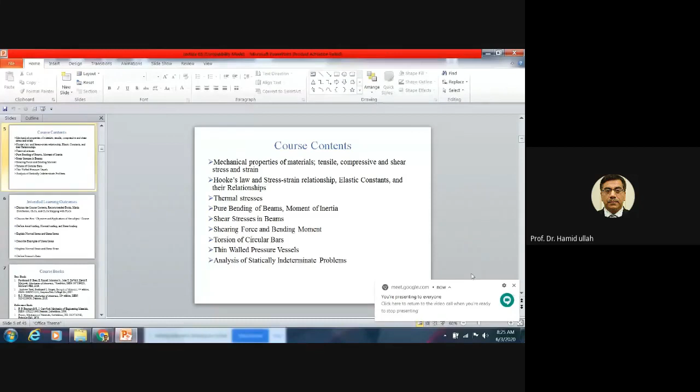No sir, there was no issue. When I shared the screen, I asked you people and you mentioned yes, we can see it. Okay, let me try again, no worries, I want to share it. Let me zoom in a bit so it appears properly. It is asking to resume presenting the screen. Hope you can see it after a few seconds. Yes sir, you can tell me again — yes sir, we can see it now, okay good. Whenever there is some problem, because I don't know, once I share the screen and you confirm it is there, then I will start teaching. But at any moment if some problem happens, the best is you let me know — for example if you cannot hear me, or the screen is not shared. I don't know what was the reason, but initially I shared it and then you couldn't see it, so let me maximize again so you can see it properly.

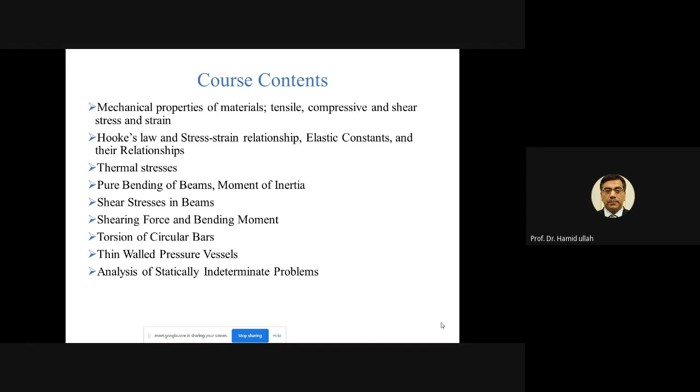So basically the course contents, I don't want to go for explanation again — these are only the topics which you will be learning and I will be teaching. Then the intended learning outcomes for today's lecture: as I mentioned in the first lecture, it is very important that for every lecture the student must know at the very beginning what they are expected to understand from it.

So these are the things — for example, since this is lecture 1, we have put an introduction type of content in the beginning. You should know the course content, the recommended books, the marks distribution, and CLO, PLO type of things, because the CLOs for the course are important and their mapping with the PLOs is important. In the classroom, in the first lecture, a detailed discussion was made on this.

And then there should be some end objective of the application of the subject, because you should know where this subject you can apply. What are the areas of application, what are the disciplines where you will be required to apply this subject of mechanics of material.

And then we will start some formal teaching, starting from load, for example what is axial load, normal load, shearing load, type of thing, and then stresses with some examples and maybe numerical solutions.

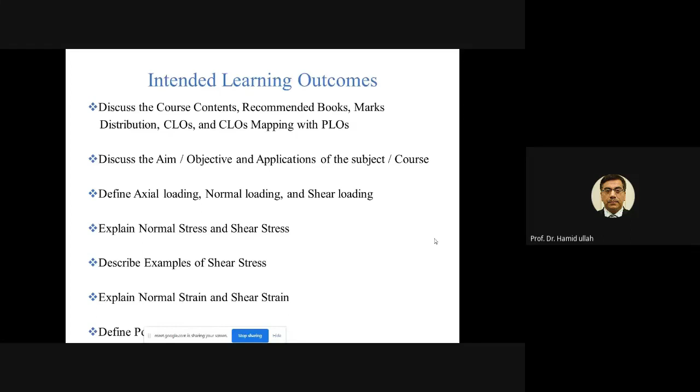And the books, you remember in lecture 1 in the class I mentioned a number of books. There are some textbooks, in the beginning I put 1, 2, 3, and then there are some reference books, 3 books are reference books.

Already I have mentioned, for every lecture in advance you will be having through Google Classroom the lecture slides, okay, PPT or maybe PDF. So already I've given it, no worry. But again, I have advised you before that it will be good that you go to the library, or maybe you can search online.

So one of these books, all are good books. I cannot say this is good and this is not good, no, these are all relevant books to the subject of mechanics of material. It's upon you which book you like the most, depending upon your sense. Some people go for simple English, some people go for good quality of pictures, etc. So you are the one to decide.

But my advice as a professor, as a teacher, would be at least one of the books, whether the top 3 or the bottom 3, you go to the library or search online, and then you must read it along with the slides I am providing. It will be something good for your learning.

And then, I don't want to go into discussion, but the only thing I want to mention here is in the marks distribution, because for sure there will be some quizzes. Already I mentioned in lecture 1, in the face-to-face lecture, there will be some assignments, midterm, final term. But now since things are changing because of COVID-19, everybody should pray this pandemic will be over soon, and then we will be back in face-to-face classes.

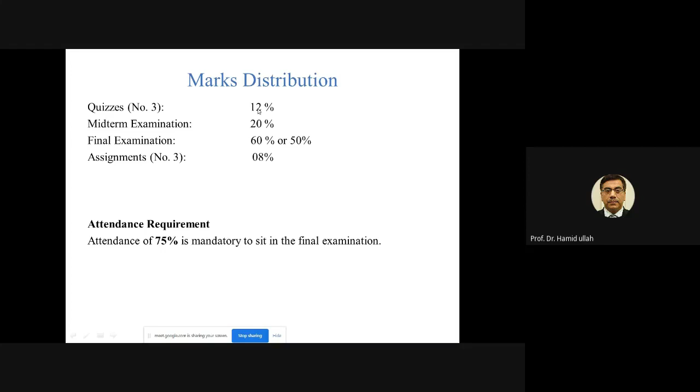And again, midterm exam, what will be the mode of the midterm exam? Once, inshallah, we move ahead, for example a week before the midterm, then we will decide the mode through which we can conduct the mid exam later on. Attendance, already you know, it is something a requirement.

So this is very important, quite a detailed discussion I have made in the lecture, because basically you are, alhamdulillah, going through OBE type of teaching and learning, outcome based teaching and learning. So there is a requirement of CLOs for every subject, and PLOs, achievement attainment.

So every subject's CLO and the program's PLO you should attain. There are 12 PLOs. If you remember, we have displayed in the department at various places, everybody should know what are the 12 PLOs, starting from PLO number 1, which stands for program learning outcome, up to PLO 12. These are the minimum which are provided by HEC. We can make it more, but for the time being, these are only 12.

And for every course, whether it is solid mechanics or fluid mechanics or thermodynamics or English, for example, or presentation or CAD, etc., there are some CLOs. CLO, you remember we have discussed, stands for course learning outcome, meaning that at the end of a particular course, this is something the students are expected to have learned.

Because once you spend one whole semester, more or less 18 weeks of teaching, at the end, what is something you should be having, but you must have learned, you must have understood. That is the expectation, and we put it in the category we call CLO.

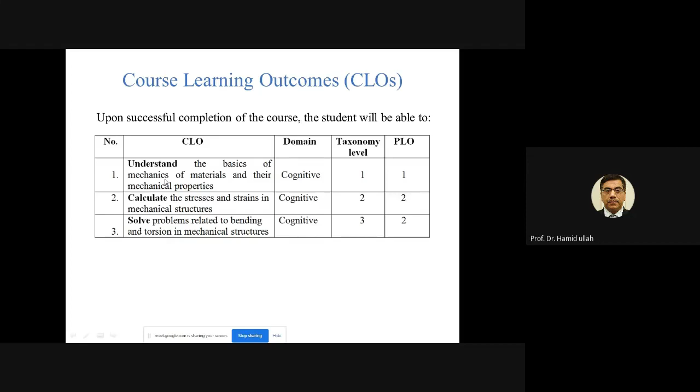Basically there are three. Number one is to understand the basics of mechanics of material and their mechanical properties, the second is to calculate the stresses and strains in mechanical structures, and the third is to solve problems related to bending and torsion in mechanical structures, and they belong to the domain of cognitive taxonomy level. CLO number 1 of this course is related to PLO number 1, and the second and third CLOs are related to the second PLO of the program.

So little discussion which already we have made, because it is a review, so not very much discussion, but a little discussion as an overview.

What is mechanics? If you remember, I mentioned that every student has gone through Matric and FSc, where you studied science subjects - mathematics, physics, chemistry and biology. In physics, mechanics is a subtopic. Mechanics is a discipline which belongs to physics, and physics belongs to science. Mechanics is important for engineering students, especially mechanical engineering students, and also for civil engineering students. So what is mechanics?

Basically mechanics is the branch of science which describes and predicts the conditions of rest or motion of bodies under the action of forces. So basically there are two things in mechanics.

One is the body, and then there is a force. If there is a body but it is not subjected to some force, there is no use to talk about mechanics. But if there is some force but it is not applied to a body, again no use of mechanics. Once there is a solid body and that solid body is subjected to external force, then you will be expected to apply your role as a student of mechanics.

And again when we say body, we have classified it into two types. One type of body we call rigid bodies, and the second type we call non-rigid bodies, or you can say deformable bodies. So what was the definition of rigid body?

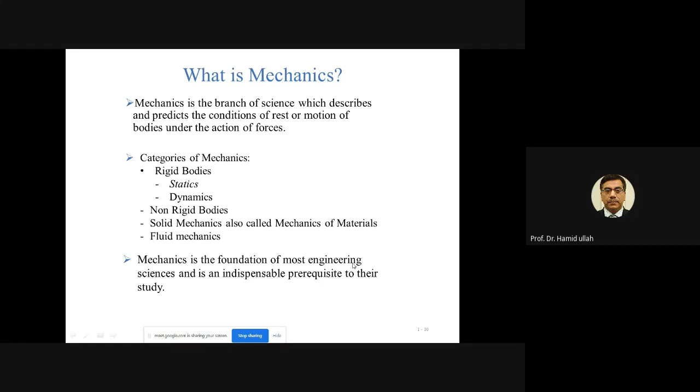Because of its importance, we can say mechanics is the foundation of most engineering sciences and is an important prerequisite to this study. So how will we define, in simple words, mechanics of material or solid mechanics? Basically, mechanics of material is that branch of mechanics which deals with the internal effect, or internal response, or the reaction, which we call stress and strain, produced in the body when it is subjected to

external force. As I already mentioned, in mechanics of material there are two things: there should be a deformable body, and you should subject that deformable body to external load. When the body is subjected to external load, it will be under stress. The applied load will produce stress in the body. So stress is an important quantity you will have to deal with, whether in mechanics of material 1, mechanics of material 2, or design.

Whenever a solid body is subjected to load, that load will produce stress. So stress is an important quantity which you should know. At the same time, when you apply external load to a solid body, the solid body will deform; strain will be produced in the solid body. So strain is another important quantity you should know, whether in mechanics of material part 1 and 2, or machine design part 1 and part 2. Remember, stress and strain are very important quantities.

As a student of mechanical engineering, or in future, inshallah, as a good designer or mechanical engineer working in some field after graduation, let's say in a design section, these are important things you will have to deal with all the time. Because all the structures and bodies, for example machine elements like shaft, gear, bearing, key, spring, are subjected to external load. Because of that, they are under stress, so how to calculate the stress, and there is strain produced in these components, so how to calculate the strain.

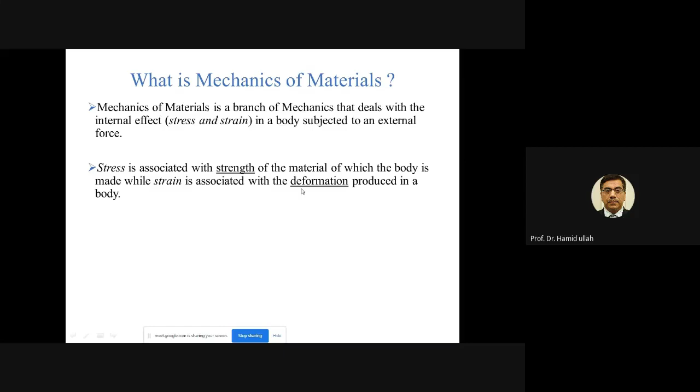And the other quantity is strain. So strain is something which is associated with deformation in a body. Once a deformation is produced, using the deformation, you can calculate the strain of the body.

So apart from this, a little discussion with respect to the applications of the subject, which is mechanics of material. Meaning you should know the areas and disciplines where the knowledge, concepts, fundamentals, or theories of this subject could be utilized. You can see a number of areas, starting from mechanical engineering and civil engineering. I already mentioned that it is equally important for civil engineering.

And then aeronautical engineering, geomechanics, manufacturing, biomechanics. Biomechanics is an emerging field in Pakistan, more or less for the last 5, 6, 7 years. It is emerging, a good field. So what is basically in this field?

Designing implants. An implant is again a solid body, and when you put this solid body in the human body, it will be subjected to external load, stress will be produced, and maybe there is deformation. So all the theory you can apply to, for example, other parts or machine elements, you can apply to the design of implants.

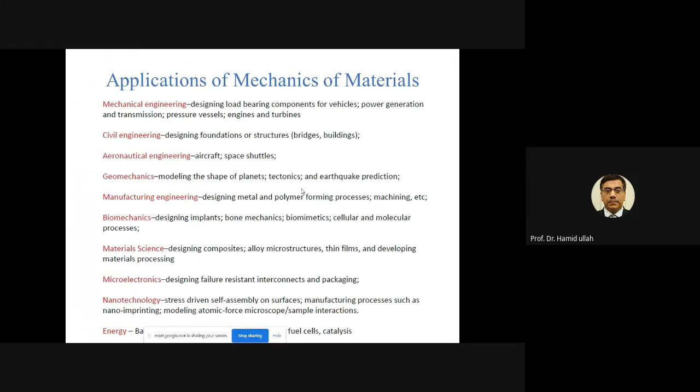What is the material you will have to select for that implant? What are the dimensions you have to select for the implant, etc. And then material science, microelectronics, nanotechnology type of areas are there where you will need mechanics of material applications. So it is very important.

It is a core subject of mechanical engineering curricula, this subject, mechanics of material, apart from other subjects like design and thermodynamics. So you should have a very good understanding. And it is very simple and easy to have a very good understanding and learning of the topics of this subject, provided you are punctual, you are regular in taking the classes, and you are taking some interest.

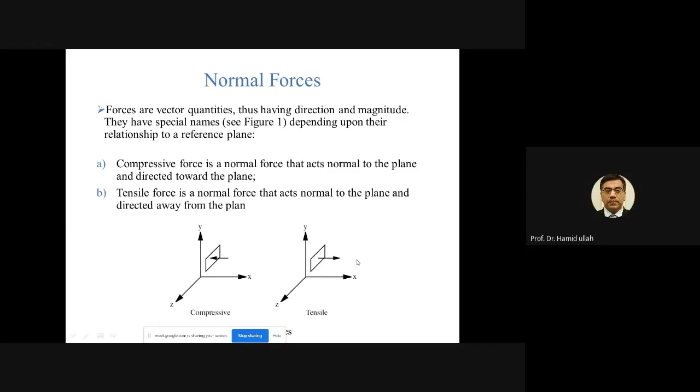Okay. Then when we say normal force, so whenever there is a force, there will be stress for sure. When it is normal force, I don't want to go into more detail because already this is the lecture I have delivered in the face-to-face, just an overview, okay. So normal force we mentioned from the previous slide. And whenever you apply normal force to a body, you can see in the figure on the left side, part A.

So here is the force, you can see from the figure, it is acting normal to the cross section, okay. So this normal force will produce normal stress, and normal stress we represent by a symbol which we have called sigma. It's a Greek letter, sigma. So sigma is a symbol we have reserved for normal stress. Now you can see here what already we have explained in the lecture, that basically we consider a small differential element having differential area which we represent by del A. And this differential element is giving a differential force, and that differential force we represent by del F. So here in this case, there is one downward force you can see in part A, that is P prime.

So here is something very important you should know, because if you remember during lecture when I was telling about the forces, I mentioned there will be two forces with respect to body. One is the external applied load, and one is the internal resistance or internal force from within the body. If you remember in the first lecture, I mentioned the example of the study chair you use in the classroom to sit in. There I mentioned the body weight of the student on a chair is external applied load on a chair, and the chair is made of some material and it has got some dimension. So the material of the chair is supporting your body weight. So there is some reaction from within the chair, and that reaction we call internal force or resistive force.

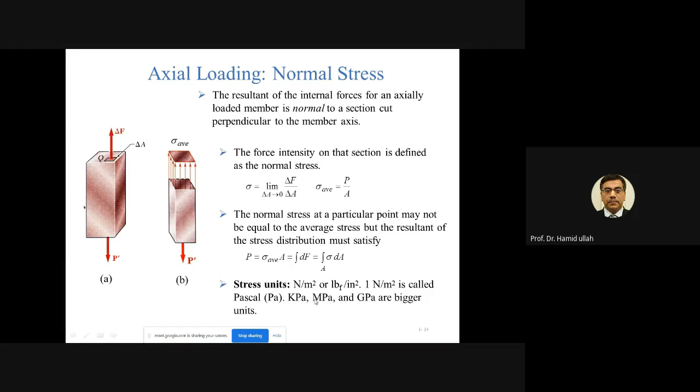And we have already mentioned that 1 Newton per square meter is called a Pascal. So Pascal is basically the unit of stress. And we have already mentioned that the kilopascal, megapascal, and gigapascal are bigger units of stress. So this was regarding normal.

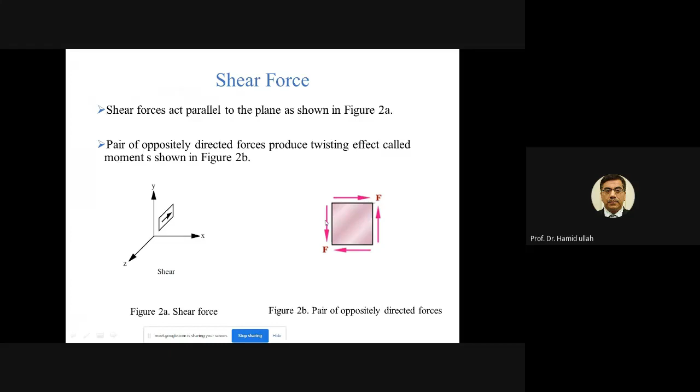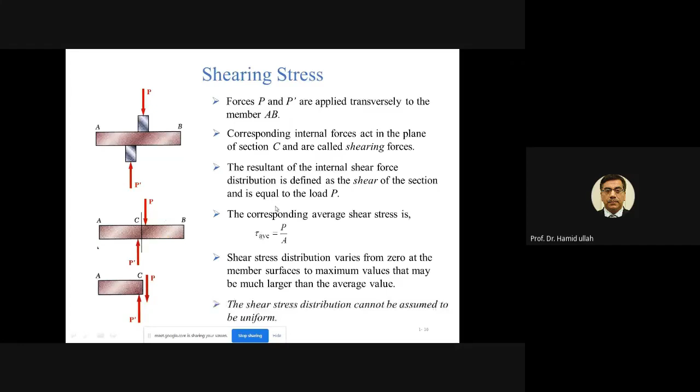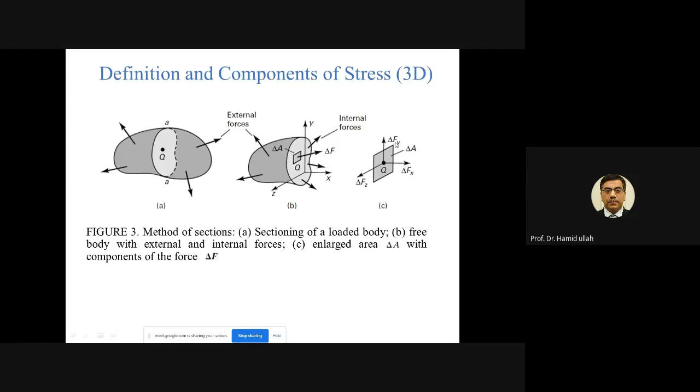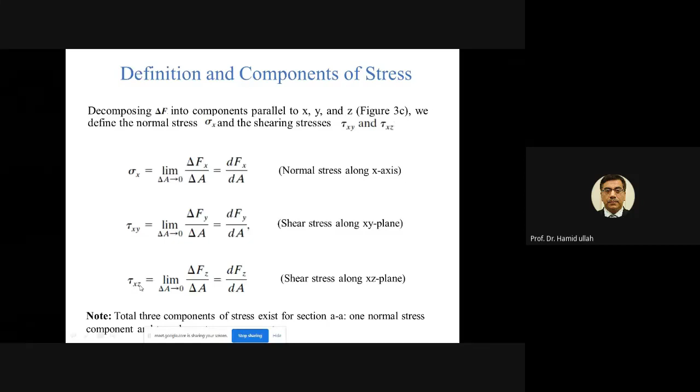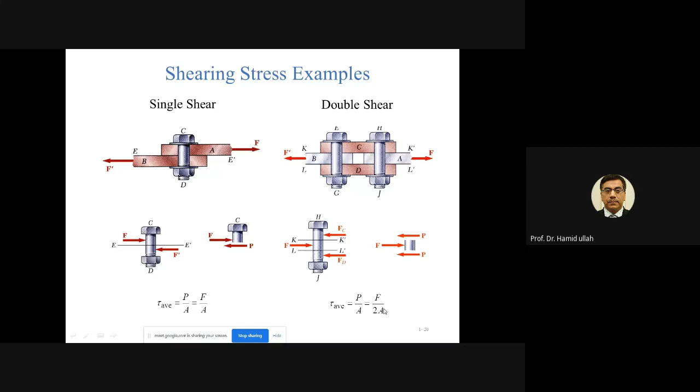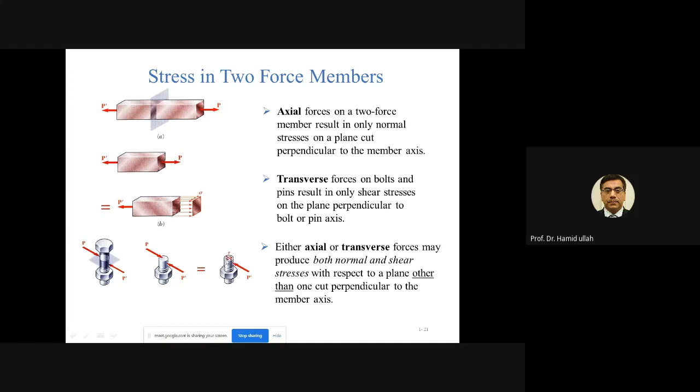So this was all about the stresses, whether normal stress or shear stress. In the beginning, I mentioned that whenever you subject a solid body to external load, there will be stress produced and there will be strain produced. So your job would be to determine the stress and to determine the strain. So far we saw how we can analyze a given body for determination of stress, and you saw the stress may be a normal stress or a shear stress.

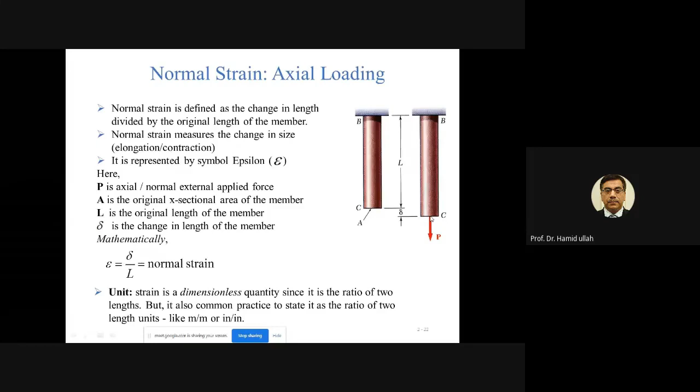In this case, when the normal load is tensile, what is the effect? It is elongating the member. But if this load reverses, it becomes compressive load, and the load will tend to shorten the member. So the effect of the load is bringing change in dimension, change in length. But shear stress is parallel, not perpendicular to the face, so it is neither bringing elongation nor shortening. It is bringing change in shape of the element or body to which the stresses are acting.

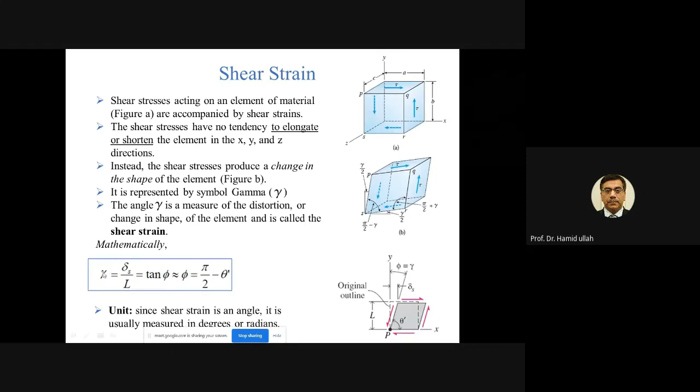So when you apply tan of phi to this right angle triangle, then you can say tan of phi will be equal to this perpendicular, which is delta S, divided by this base. And then from mathematics rule, if angle is very, very small, then tan of angle will be equal to angle itself. So gamma equal to del S by L. So this is how we can calculate shear strain.

A simple quantity, important quantity, already we have discussed in today's lecture overview. This is called Poisson's ratio. So the name shows it is a ratio. It is having no unit. And Poisson, the person who basically introduced or presented this ratio, that's why it's called Poisson's ratio.

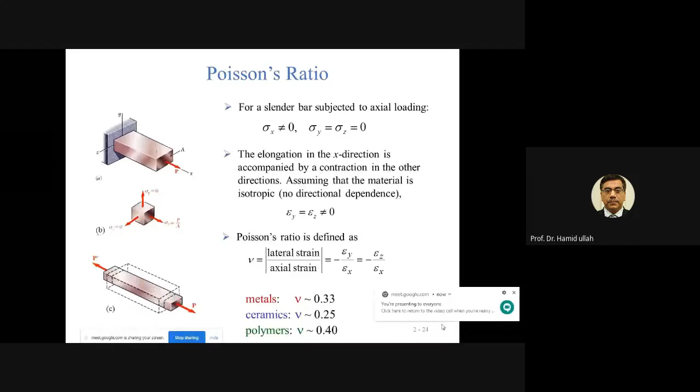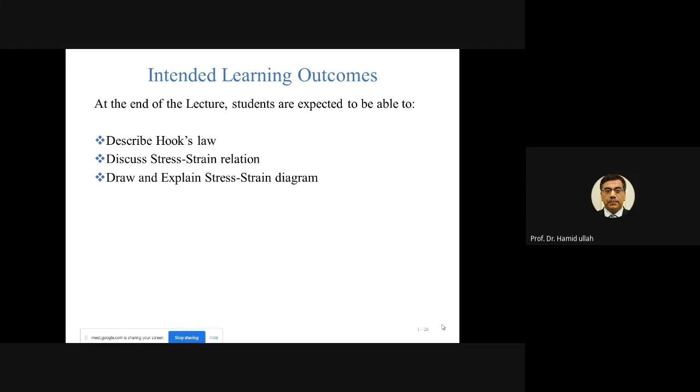Second, you should be in the position to discuss stress-strain relationship, and you are expected to be able to draw and explain the stress-strain diagram. This was covered in detail during face-to-face teaching; here it is just an overview.

A question may arise: why do we want to know the stress-strain diagram or relationship? If you want to analyze a structure or a machine element, you can analyze it for the sake of stress, to find what stresses are produced in it. That is called stress analysis.

Whether it is a matter of structural analysis or design, remember I mentioned this subject is a prerequisite for two subjects in semester 4 and semester 5 called design of machine elements. The more rightly you understand the concepts and theory of mechanics of material, the more rightly you will understand the concept of design.

Already I have mentioned in class: if you want to design something, say a chair, what is the minimum requirement in design? The chair is made of parts - there are legs, a seat you sit on, and a support. So there are different parts of the chair.

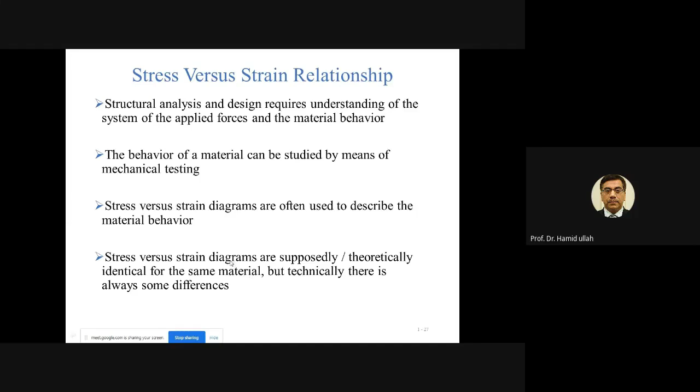If you use the same material and make a sample, conduct a tensile test, and draw a stress strain diagram from the test data, then produce another sample of the same material and test it again, drawing another stress strain diagram, theoretically these diagrams will be similar, but technically they may differ slightly from one another.

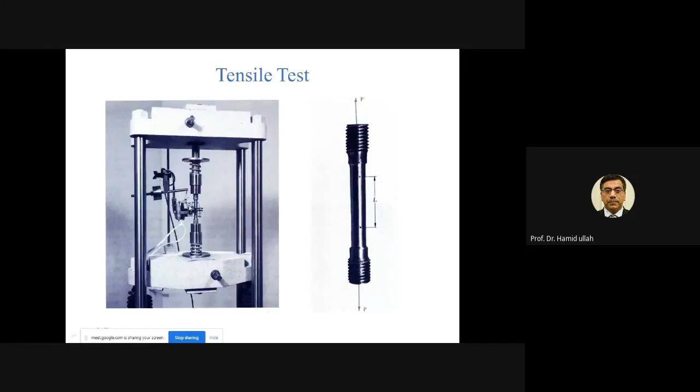Then you apply the load. The load is normal, and it will be applied gradually, from 0 up to maximum value. So when you apply load with the help of this machine, it will elongate this sample, and there will be an increase in the length, a change in the length.

So the change in length you would like to measure in between these two marks, in the gauge length. This is the same explanation basically.

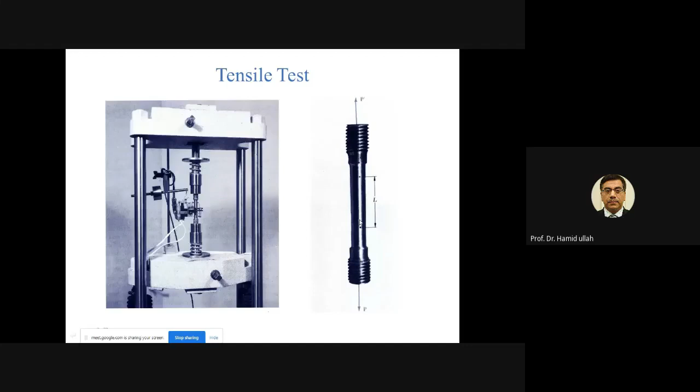You can see again, this is the sample which is subjected to tensile load with the help of the machine. Let's say the original length of the specimen is L, and after it is subjected to load, because of the load there will be elongation, a change in length, which is shown here with the symbol delta.

Now, how to calculate stress and how to calculate strain we already have seen from the previous lecture, which covered how we can determine or calculate stress and how we can determine or calculate strain. Using those approaches, you will calculate stress and strain.

Here you can see, the stress is calculated using the cross-sectional area, which you can calculate of the sample. Deformation, which you can see the dotted one, from deformation you will calculate what is called the displacement. Then using the displacement, the deformation, in the original length you can calculate the strain.

And there is another alternate way by using a strain gauge, which can also measure the strain produced in the part when it is subjected to load. Once you have calculated stress and strain, then you draw a diagram called the stress strain diagram, using the formula and approaches we discussed in the first part of the lecture. Plotting the data, the diagram you obtain will be called the stress strain diagram.

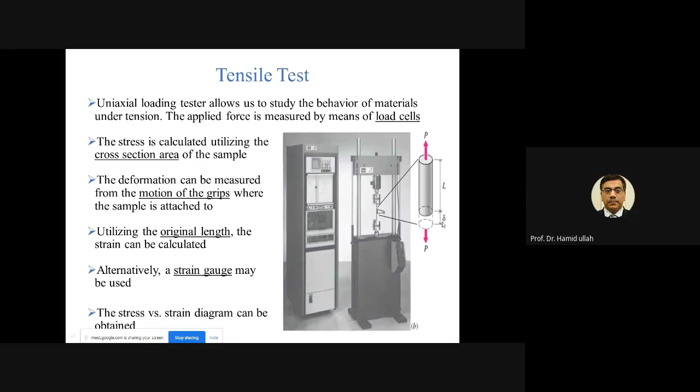You can see here in the figure, this is the load. So the load, you divide by area, and it will give you stress, because stress is load by area. And here is the elongation. The elongation, when you divide by the original length, will give you strain. So this way you change the data from load elongation to stress strain, and the diagram you get will be called the stress strain diagram.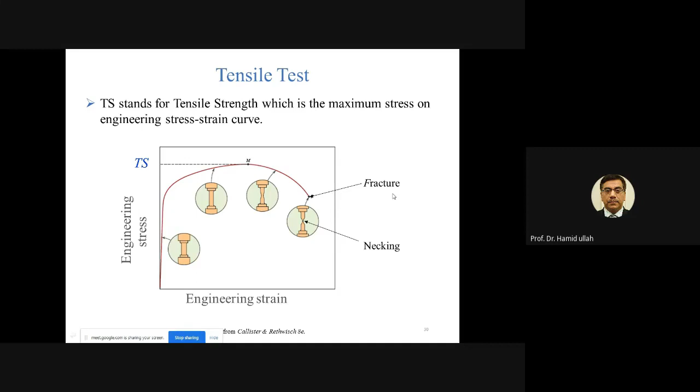Also, later on you can look into this, I already explained in class that I put the question mark: why stress versus strain, why not load versus elongation. So these are the basic explanations.

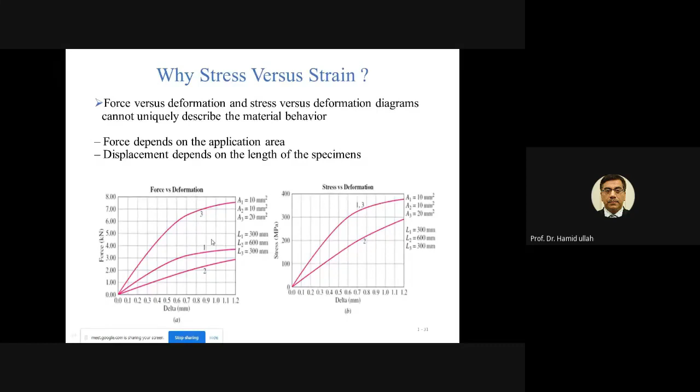If you look into force versus deformation or stress versus deformation, for the same data you can get a number of curves. So you can see curve 1, curve 2, curve 3, but if you put all together in the stress and strain diagram, then all three curves will merge into one curve. And from one curve you can get the properties of the material. So it is recommended and advisable that in order to understand or study the behavior or properties of material, one must draw a stress strain diagram.

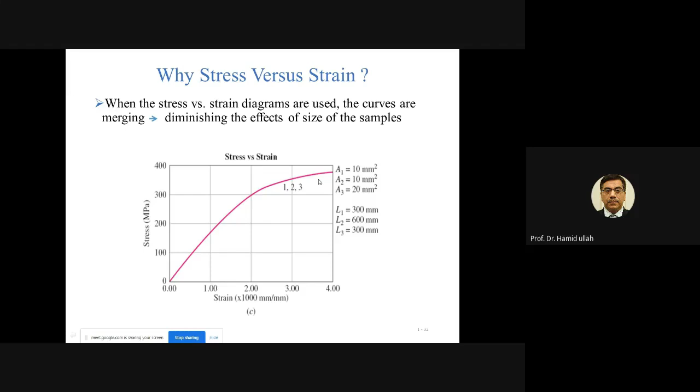So this is basically the stress-strain diagram, and let's say here we have taken a ductile material. You can see again in the figure, here again you can see the necking, because the narrowing of the size at this point has started. So this is the necking, and after necking, what happens? You can see here the failure. So if this is a ductile material, for sure there will be necking starting. But if it is not a ductile material, you cannot expect any necking. It will be a sudden fracture.

A number of points we have mentioned in the classroom. These are various important points you can see in the diagram. One point is called proportional limit, one point is called elastic limit, the next point is called yield point, and another point will be the ultimate point. So initially, when there is no load, there is no strain and no stress, you will be at zero. But when you apply load, the load will bring stress and strain. So as you increase the load, stress increases and strain increases.

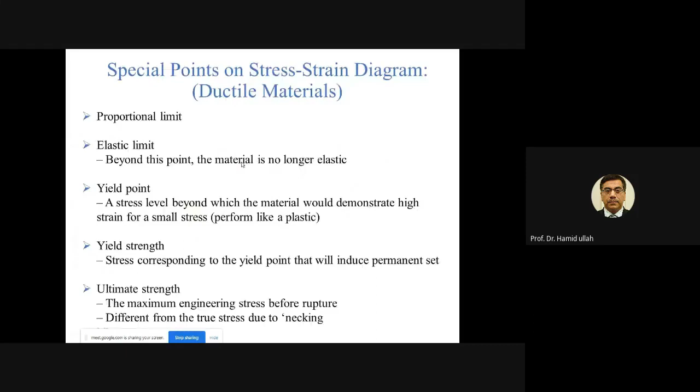Since material strength is increased because of this process called strain hardening, you can see in the graph that once strain hardening starts, the curve moves up. Why? Because strength of the material is increased, therefore you will have to apply more load to fracture the sample or specimen. This type of strengthening is often called cold working or work hardening.

Why is it called cold working? It is called cold working because the plastic deformation must occur at a temperature low enough that atoms cannot rearrange themselves. The temperature is low enough that it doesn't allow the atoms to rearrange. That's why it is called cold working.

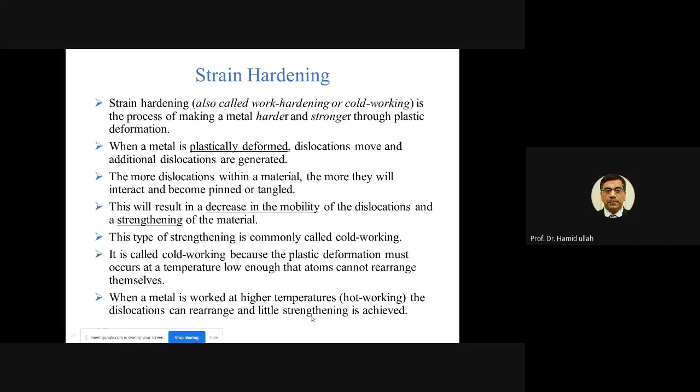The opposite of cold working is hot working. When a metal is worked at higher temperature, it is called hot working, and the dislocations in this case will rearrange and little strength is achieved. So this is how we can define strain hardening.

Why? Because brittle material doesn't give any noticeable elongation when you apply external load. You increase the load from 0 to maximum, and when the load reaches its maximum value, the material or specimen will suddenly fracture.

Okay, so no necking, no cup and cone. But in the previous case you saw in the sample there was cup and cone and there was necking. In the graph you cannot see it. So basically you start from 0 and then you apply load, and because of the load, stress is increased. When the load reaches its maximum value, where it will give you the ultimate strength, at that point what will happen? Basically this material will fracture.

So here the important point is, we mentioned two materials in the classroom that we have already discussed: one ductile material and the other brittle material. So whenever you are designing something of ductile material, there is the yield strength. I want to bring you here again, yield strength. So basically this is the yield strength sigma y. This is the governing strength which will be used in the design of a component made of ductile material.

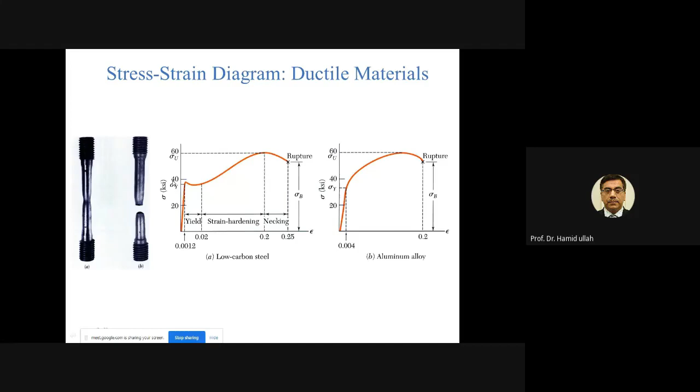But if you want to make use of brittle material, then for brittle material, since there is no necking, there is no yielding, it is sudden fracture or rupture, which takes place at ultimate strength. So for brittle material, the governing strength you will have to use in the design is called ultimate strength. So these are two important things you should remember.

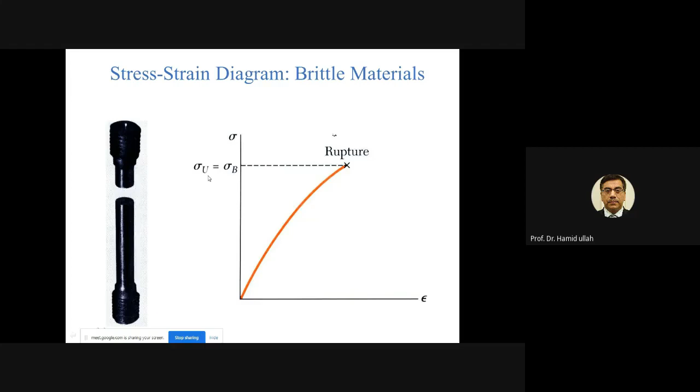And then we can mention Hooke's law, or the relationship between stress and strain. So basically in the stress strain diagram, we already mentioned the elastic point, or the elastic region. This is the region at which stress is relieved once you have removed the load from the body. So you can say up to the elastic limit, and the proportional limit and elastic limit are close to each other, the stress and strain are linearly related. Meaning when you increase stress, strain will increase and vice versa.

So what you can say is Hooke's law. Hooke's law gives a relation between stress and strain. If it is normal loading, it will be normal stress and normal strain. So you can write stress directly proportional to strain, or stress equal to some constant of proportionality times strain. In this case of normal loading, the constant of proportionality is Young's modulus, which is a material constant.

If it is shear loading, Hooke's law will show that shear stress is directly related to shear strain, or shear stress equal to some constant of proportionality times shear strain. In this case the constant of proportionality is again a material constant, but in shear loading it is called the shear modulus of elasticity. So this is Hooke's law for normal loading, and this is Hooke's law for shear loading. In both these equations, capital E and capital G are material properties, material constants.

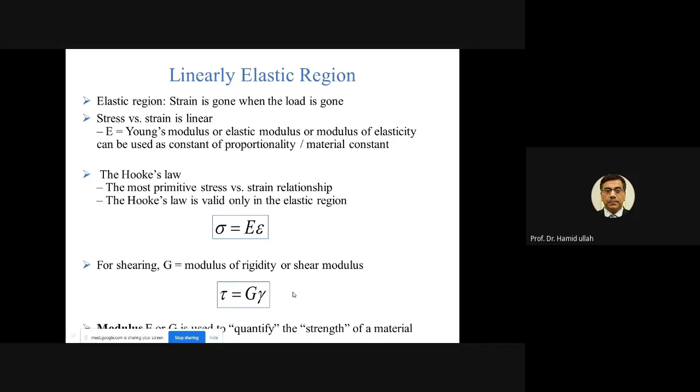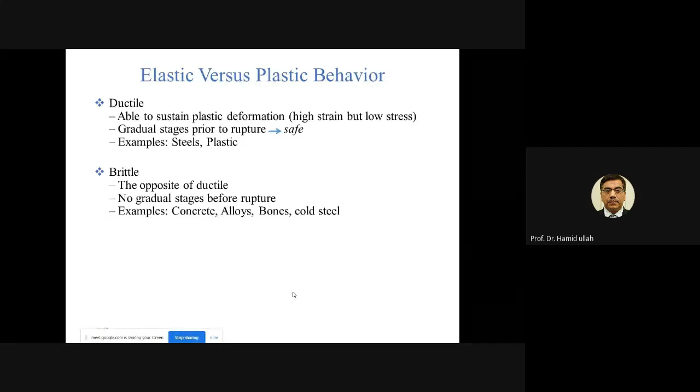Okay, so we already mentioned ductile and brittle material with respect to the stress strain diagram, and with respect to the surfaces after they have failed. The same we can see from this diagram if you want to mention elastic versus plastic behavior. Here you can see the stress and strain diagram. This is one curve, the red one, A, B, C, and then up to rupture.

So this is loading, this arrow. The arrow is up, so this is showing loading the specimen. So from 0 you load, then you reach B, then you reach C, and then you reach a point where rupture of the specimen takes place.

Here at point C, if you want to unload the specimen, this arrow which is moving down basically shows the unloading of a sample, meaning you remove the load. So here it is very obvious and clear, for example, elasticity and plasticity. Let me read it out. So again, the same we have already mentioned.

If the strain disappears when the stress is removed, the material is said to behave elastically. The largest stress for which this occurs is called the elastic limit. And when the strain does not return to 0 after the stress or load is removed, the material is said to behave plastically. So elasticity, plasticity. Right. So the same you can see here.

Let's say you load the specimen and you reach some point, let's say this point B shows the elastic point. At the elastic point, if you remove the load, then you will move back to 0. Why? Because the specimen is capable to regain its original dimension or original position, and whatever strain was there in the specimen is relieved, because that was a temporary strain.

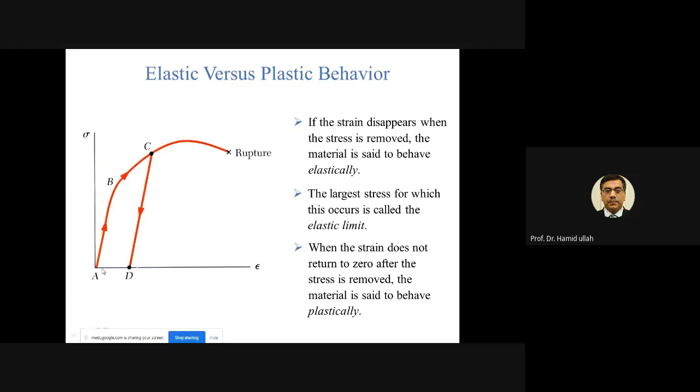But this much strain is not relieved. It will stay, it will remain in the sample as a permanent strain, and this will produce a permanent set in the body or in the component.

There is some effect of composition on the material. If you want to make it ductile or brittle, there is one way. High alloy content will cause the steel to become ductile. This is again the stress strain diagram, and at point A it is low alloy content. At point A the strain is very less compared to point B, then at point C it is more, at point D it is more again, and at point E it is the maximum, because high alloy content is added to the steel.

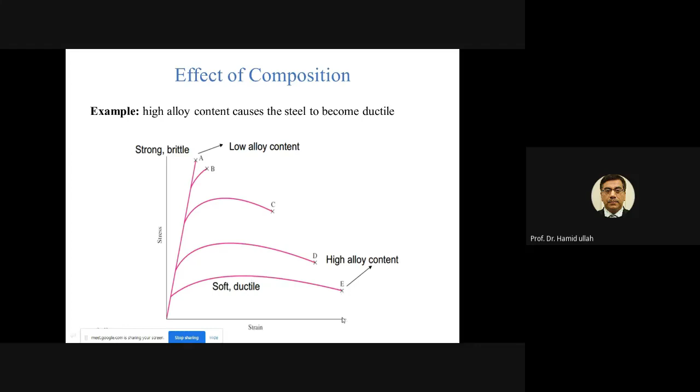So what is the point? High alloy content causes the steel to become more ductile, and more ductile means more elongation, and more elongation means more strain. So point E gives you the maximum strain, because the steel has become more ductile.

There is also some effect of temperature: high temperature will cause the material to become ductile, and the same is clear from this diagram. 70, 750, 840, 930 degrees F. As the temperature increases, you can see the strain is increased, because the material has become more ductile, and more ductile means more elongation and more strain.

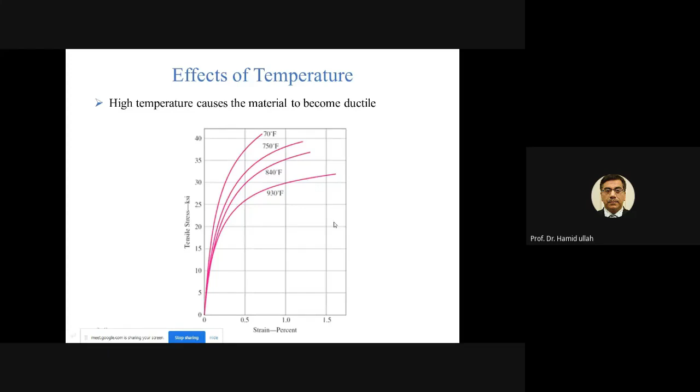There is some effect of loading also. Remember in the beginning we mentioned there could be tensile load or compressive load acting on a body, and we discussed two types of material, ductile and brittle. For ductile material, tension and compression behavior are assumed to be the same, meaning the strength of the ductile material in tension and compression is the same.

Whatever resistance a ductile material offers in tension, the same it can offer in compression. But for a brittle material, tension and compression behaviors are different. In terms of strength, for a brittle material, strength in compression is more compared to strength in tension. So this is the effect of loading direction, tension and compression.

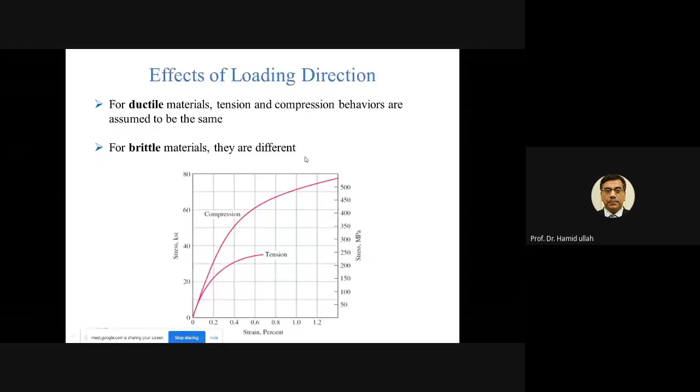Okay, so now in this case, you can see on the slide what we want to do. Again, more or less same discussion. There is a solid body, you can see in the figure, and the solid body is subjected to tensile load. It has got initial length, and it is elongated by amount delta. Okay, so all previous discussion.

But the only thing here we want to mention is in this slide we want to come up with a formula, a mathematical expression that will help us to determine the value of elongation. So here in the slide you can see, this is the elongation. Now this much elongation in the body has occurred due to the applied load. And my objective is to find out the magnitude of this change in length or elongation.

Now, making use of Hooke's law, we can develop a relation which will give you the value of this change in length. Already we know that because it is normal load, stress will be normal, and similarly strain will be normal. So stress equals load by area. Already we have seen that.

So this is basically Hooke's law, and this is the strain definition. You can write strain equal to change in length divided by original length. And the Hooke's law we mentioned is that stress equals strain times modulus of elasticity. So basically from this equation you can write.

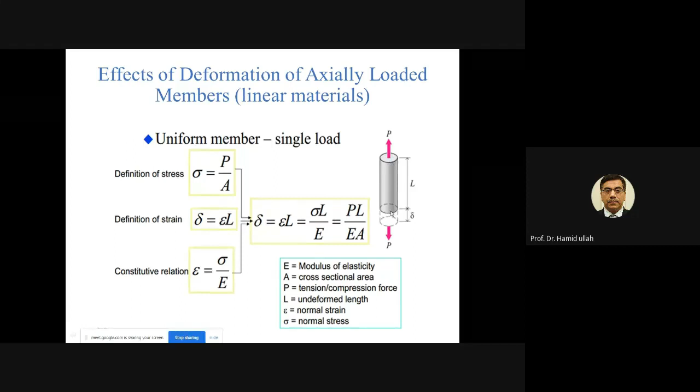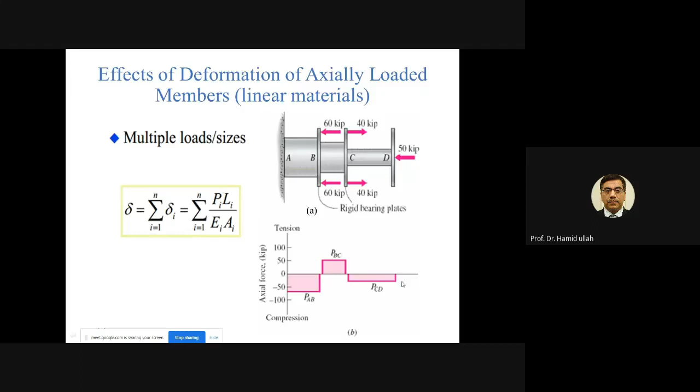So with all this, this was all about the revision, the overview of the previous lectures, so that it is fresh, and from the coming lecture, inshallah, you will be in the position, you will be capable to understand easily the other topics of the subject. So from my side, over, and now it's over to you people.

Any question you want to ask? Most welcome. Students, over to you. No sir, it's clear, sir.